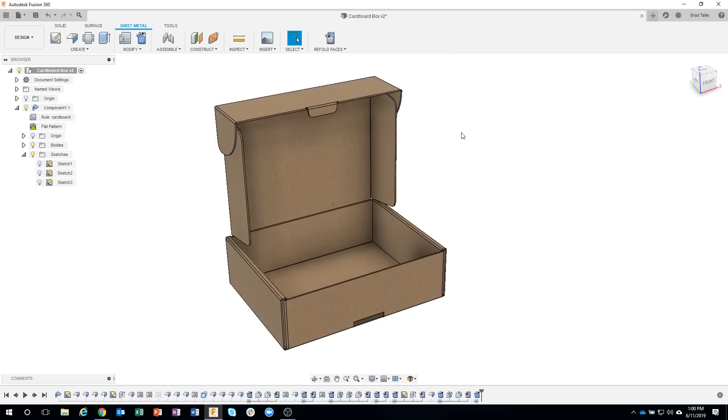I have an example cardboard box here, and I'm going to show how to create this. This actually came about because I have a cardboard box that a product I ordered came in, so I thought, hey, I wonder if we could make something like this. Here's the actual design, and you'll notice it looks pretty much exactly the same as what I just showed. There are little tabs, holes, and we're going to go through and learn how to make this box inside of Fusion 360.

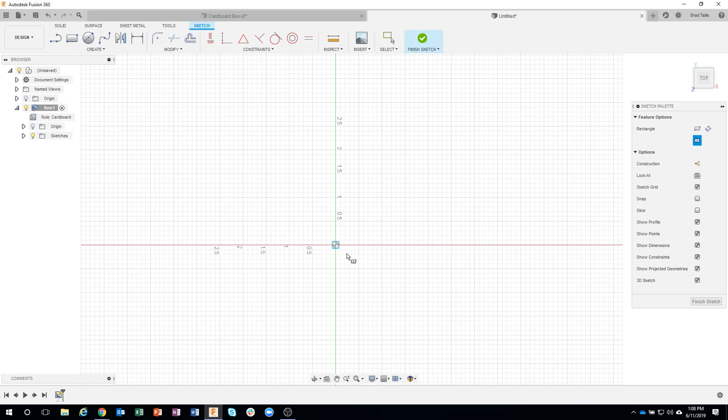Underneath this box component, I created a sketch. Let's go ahead and do a centered rectangle. This is important - I'm going to try and keep things as symmetric as possible because this box is pretty symmetric; what's on the right side is kind of on the left side, etc. So I'm going to create a symmetric rectangle. According to my measurements of the existing cardboard box, it's about 10 3/4 inches in length by about 8 inches in height. So I'm just going to type in those dimensions and hit enter - 10 3/4 by 8.

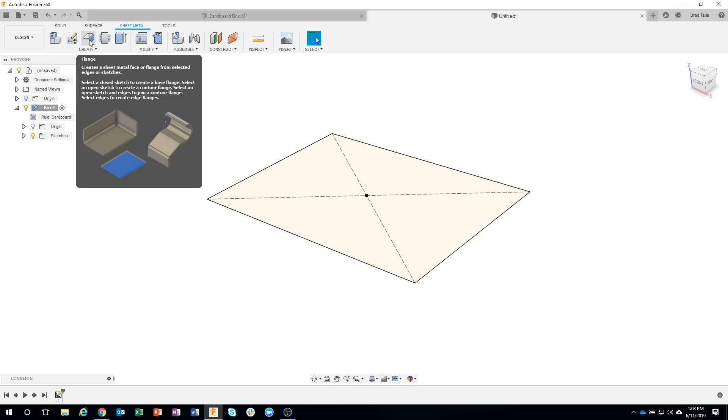I'll finish my sketch, and now I'm ready to start creating my sheet metal part. The cool command here is this flange command - it's actually multiple commands in one. Here's a cool tip: if I just click on my profile and right mouse click, that flange command is at about 4 o'clock in my marking menu, so I don't have to keep coming up to the menu to do that. So I'm just going to come over here and say flange, and you'll see it gives me a preview of what that looks like. I'll say OK, and I now have a bodies folder underneath my box component.

Okay, so let me go ahead and close that up. So now I have this rectangle, 10 3/4 by 8, and I want to start folding the box. I typically do the easy stuff first and then work my way toward complicated. Now, these first two flanges are going to be pretty simple, but the next ones after that is where it gets a little bit more complicated.

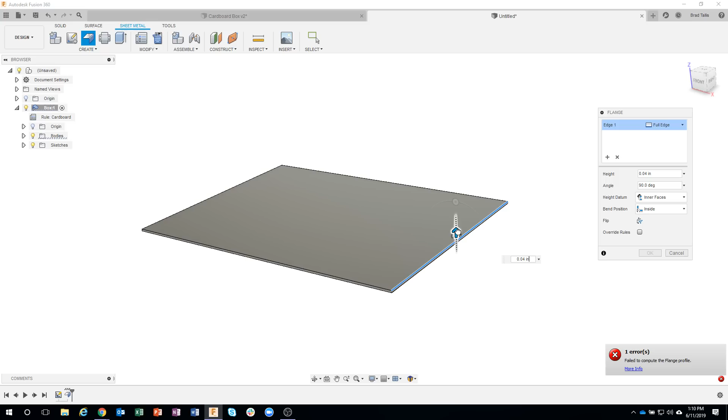So I'm going to click on this top edge, right mouse click, and say flange, and you'll see it brings up this flange menu. Now I like to start to drag, and you'll notice we get an error - every time you drag, you'll get an error. The reason for that is because when it's too small, it physically can't create the preview, so it just says it failed to create that profile. But as soon as you get far enough, that goes away. So don't freak out when you see that error, especially when you're doing a preview like this.

Now it's asking for the overall height, and again, according to the measurements, it's 3 1/4. So I'm going to type in 3.25.

It gives me a nice preview, and I'm going to zoom up here and notice how small this little tiny radius is right here. Again, that was because when we created that cardboard material, we set the bend radius to be 0.01. So it's almost like we're kind of crushing the cardboard right there.

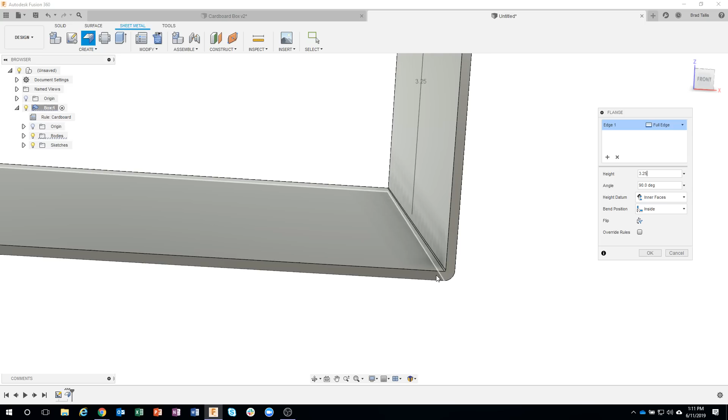Where if this was regular sheet metal, you'd probably have a larger bend radius there. So you could use sheet metal for creating sheet metal parts, cardboard, plastic parts. You could actually heat plastic and bend it. If you know what the minimum bend radius needs to be for those kinds of materials, you can use sheet metal for any of those designs.

Now I'm going to do the other edge at the same time. So I'm going to go ahead and Control select both of those edges. We can see how it's creating a bend for us automatically at 90 degrees at a height of 3 1/4.

Now we're going to learn about these bend positions and stuff like that a little bit later. But I'm going to go ahead and change the height datum to be outer faces. Now, again, I'm doing some things here where you might be like, well, why did he do that? Definitely recommend watching that other live stream where I talk about each of these options here, like the height datum, the bend position, etc. But I'm going to set this to be outer faces.

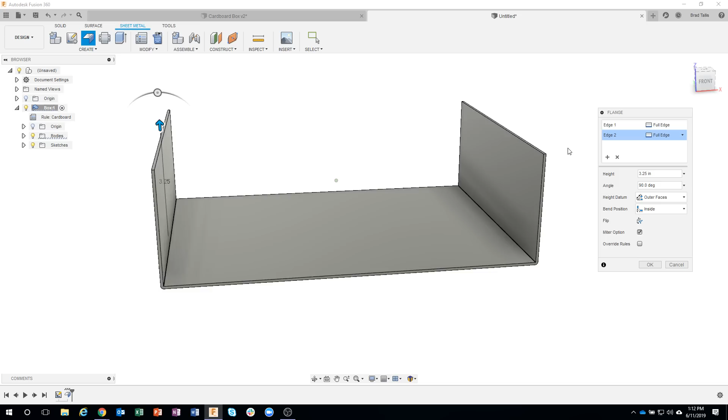What that's basically doing is it's saying it's going to be 3 1/4 from this bottom face to this top face here. If I had it set to inner faces, it's actually going to be 3 1/4 from this inside face to the top face. And just to be exact, the overall height of the box was 3 1/4 from top to bottom, so that's why I changed that.

We'll talk about this bend position a little bit later. I'll go ahead and say okay. And that's basically, we're just starting the cardboard box.

Now I could flip back and forth between the video and the screen or whatever, but I'm just going to kind of simplify things here. But we're starting with the design of the box. Let me jump over here. Actually, this might make more sense. What we just did is we just created this wall here, and we've created the bottom here. So we just created this wall.

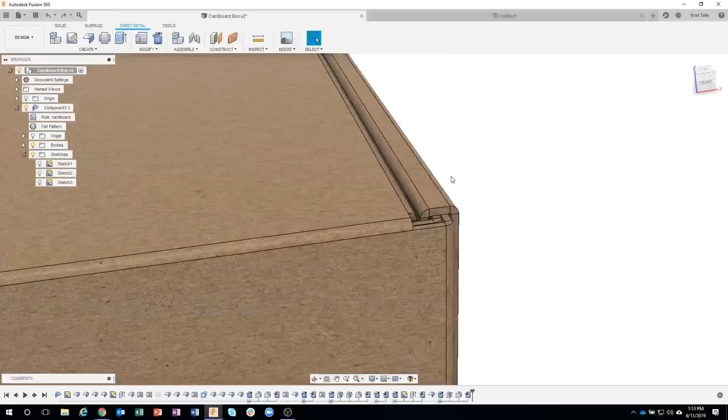Now I want to create this folded over section right here. And you can actually see it's getting kind of complicated in here, but we've got multiple flaps that kind of fold into this area here. And that's how this box stays together. Okay, so that's what we're going to do next.

So I'm going to click on this edge over here, right mouse click and say flange. Again, I like to start to drag just to get kind of a preview of what that's going to look like. And using the measurements from the cardboard box, this was 0.375. And so you can kind of see when I typed that in, it kind of jumped back a little bit.

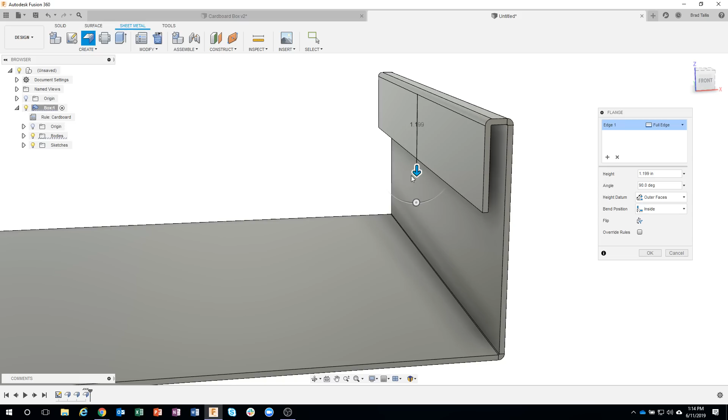We're going to go ahead and leave everything alone. I'll say okay. And then the next part I want to do is to basically create the part that folds down. So I'm going to click this edge and say flange and start to drag. And we can now see how we're basically kind of folding this cardboard over. Now I want this height here to go all the way down to here.

So I'm going to go ahead and click on that face. And again, you'll notice, even though I clicked on the face, it didn't go all the way down. And that has to do with this height datum. Okay, so I'm going to change that to be inner faces, but notice what happens now. It's actually intersecting with the model, and this is bad.

Okay, we'd never want our sheet metal stuff to physically intersect with each other. And so I can see right here it's 3.098. Let's go ahead and just take the 8 off of there, and now we can see that that lifted up just a hair off of that floor.

Okay, and this is fine because it's not intersecting. And later on, I'll show you what happens if you accidentally intersect. We're going to create a mistake here in a little bit, and you'll see how we're going to fix that. So I just removed just a little tiny bit off of that. And again, I'm just going to leave everything the same and say, okay.

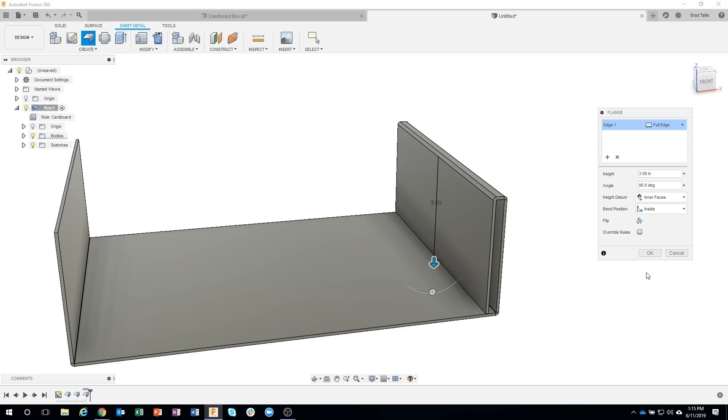So we just started creating this side. Now here's one of the tips that I highly, highly recommend you do when you're working in sheet metal, and that is to unfold it as you go through your design. So I'm going to say unfold, and it's asking for a stationary entity. What's kind of staying flat?

So I'm going to say this guy, and then you can see it says bends, and it's highlighted a couple of our bends in green. Now I could do one at a time, so I could click on any of these, or I could say unfold all bends. And this is what I typically have set, okay? And you'll notice that it laid out flat. So this is good. If it unfolds and lays out flat, we know that everything is good, okay? So I check my work as we go through by unfolding to make sure this thing can physically unfold.

Okay, so the next thing I want to do is, it's kind of hard to see on the box, but there's some holes right here, so some slots that these little tabs fold down into and are held in place like so. And so we're going to simulate that. So what we basically just did is we just created this area right here, where we came across and then we folded it down again.

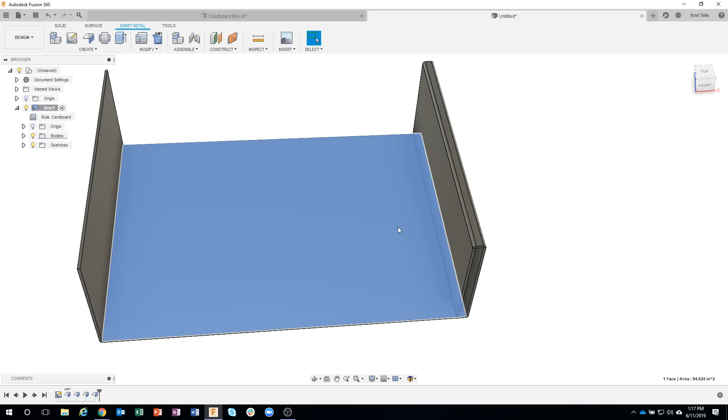Okay, hopefully I don't have to jump around too much there, but what I want to do now is create those holes. And this is what I think is so cool about our sheet metal, is we can use regular modeling commands, like for example creating a sketch, and I'm just going to mock up my design. I want to put a rectangle right in here somewhere, and maybe one up here. I'll just line that up, do something like that.

Now I want to be more precise, so I'm going to hit D for dimension, and let's just make that 1 inch tall, and let's make it 1 inch from the edge of the box, because that's how it is on the actual cardboard box. So you can see how it's 1 inch tall, it's 1 inch from the edge. And I want it to be a specific width. I want it to be a little bit wider than the cardboard itself, because we want to be able to push that tab into this.

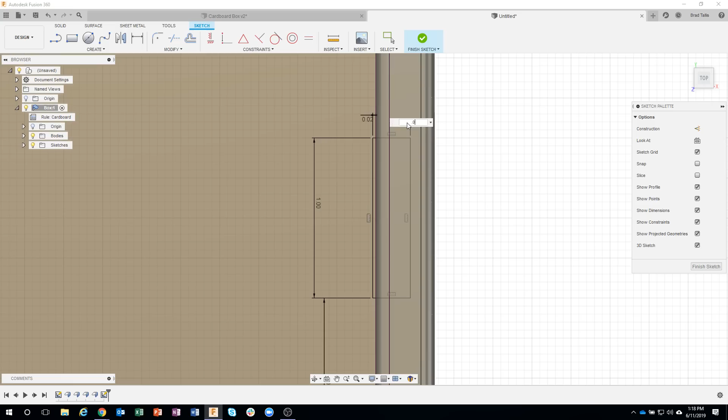So I'm going to say, let's just do maybe 0.02. You can see how that moved over, and I'll do the same thing right there, 0.02. And now you can see this rectangle right here, and you can see inside of that the piece of cardboard. So we have a little bit of extra room there for it to slide down into. So I'm going to do the exact same thing up here. I'll just throw a couple dimensions on here. Make that 1 inch also. 0.02. And same thing over here.

Now here's another neat little trick. If I place my dimension, I can just click on an existing dimension, and it's going to reference that dimension. So instead of having to type in 0.02 again, I could just click on this guy, and that one's going to equal it. Okay, so I'm going to go ahead and say Finish Sketch. And now I've got some rectangles here, but they're hard to see. And I've shown a cool trick where you can probe through just by clicking and holding your mouse, and I can grab that profile. But unfortunately, I actually need to grab about 3 profiles. It's really hard to see there.

So another tip that I sometimes do is actually turn off the body. And now you can see just the sketch, and the body is out of the way. And now you can see, sure enough, there's this little rectangle here, a larger rectangle, and a little rectangle there. Well, why is it split into 3? Well, it has to do with that piece of cardboard that got automatically projected.

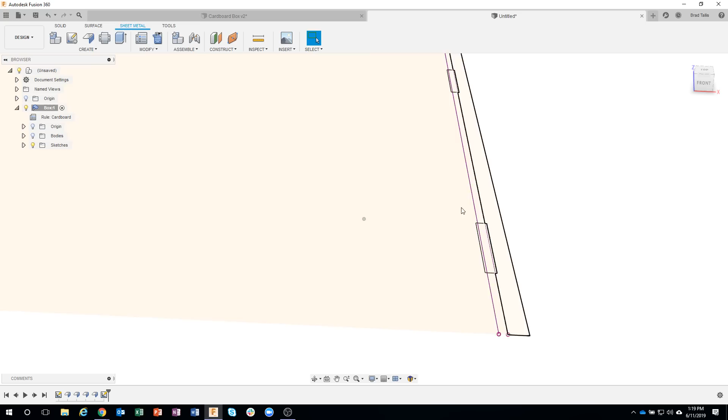So here's another neat little trick. I can go back to my sketch, and let's just click on those 2 lines and turn them to construction geometry. And so now they're construction lines, and this is all one profile now. It's not being split by those other object lines. So I can much quicker and easier click these profiles.

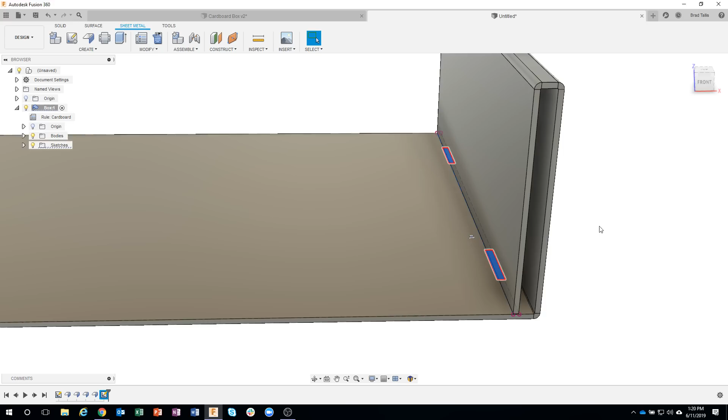Hopefully that makes sense. I'll go ahead and turn the body back on here. Right mouse click and say either extrude or press pull. It doesn't matter. I'm going to just start to drag down, and you can see it's taking those rectangles and machining it or cutting it through the material.

Now how far? Well, just click on the bottom face. And it snaps to that bottom face and it sets that distance for you automatically. I'll go ahead and say OK. And I've now created those holes for where we want these tabs to be. So the next step is to create the tabs. And you're going to learn a couple cool little tricks here.

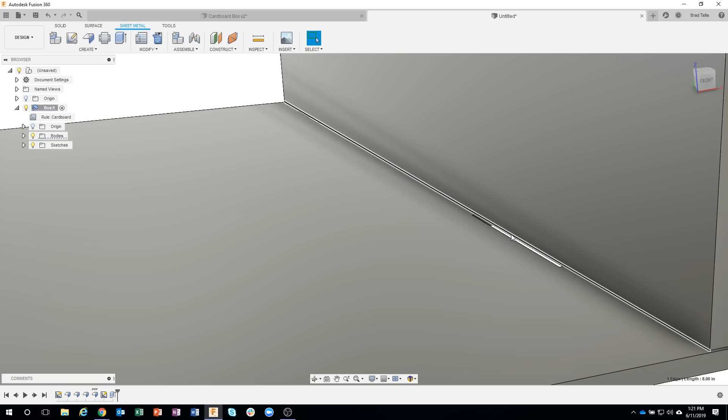So the first thing I'm going to do is kind of zoom up on this. Let's work on this front tab right here. I'm going to click on that edge, right mouse click, and say flange. Now by default, it's wanting to put a flange along that full edge. So if I were to start to drag, you're going to see it's going to try and put a flange along that full edge. Okay, well, we want to just do a little section.

So I'm going to click on there. Actually, let me cancel out so it doesn't remember things. I'm going to say flange. I'm going to change this and do a 2 offset. Now what this allows you to do is to actually create the tab wherever you want. And what I typically do is I get it kind of close. So you can kind of see I drag the arrow there. I'll drag the arrow kind of over here.

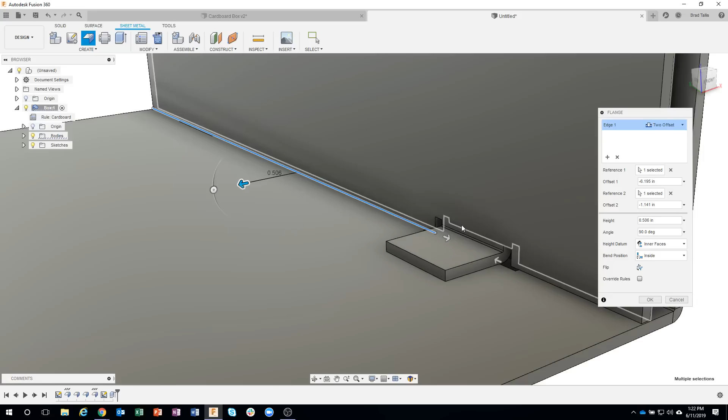Okay. And now when I start to drag my height, you'll see that it's only putting that tab where these 2 offsets are. Now the other issue you see is it's going at a 90-degree angle, and we want it to go straight down. So I'm going to change angle to be 0. And now it's actually basically adding some extra material to that edge.

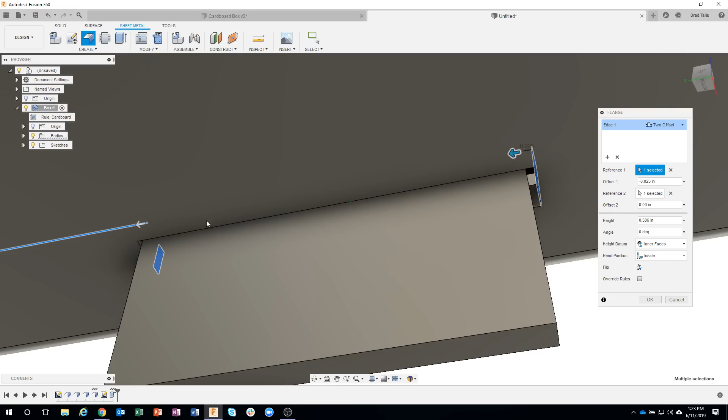Now we want to be more precise. So I'm going to go ahead and clear this reference and maybe click on this face here for one reference and this face here for the other reference. Now that is exact. So it's not giving us any slop or anything like that. So I want to basically drag this back a little bit to give us a little bit of extra room. Same thing over on this side. I'm going to drag that back a little bit to give us some extra room.

And in this case, let's just do maybe 0.02. Let's see what that looks like. That gives us a pretty good gap there. So I'll say 0.02. And then the last thing is the overall height. Okay. So we can kind of see that with this arrow here.

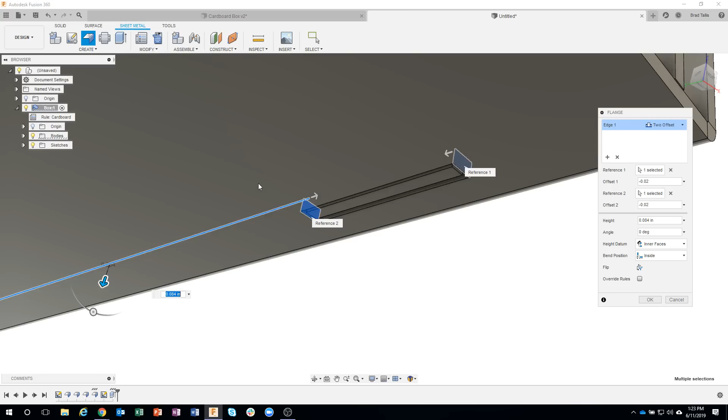So another neat little trick is I can click on an existing face and it's going to snap the height to that face. So instead of having to do a lot of measuring or guessing, where I'm like, okay, that looks close, but it's not quite, all I have to do is get near a face and click, or an edge or a point, and it's going to snap to that face. And you can see we have pretty good clearance all the way around for this tab. Okay, so I'll say okay.

Let's go ahead and unfold this really quick just to see what that looks like. I'll say unfold all the bends, and let's just click on that, and we can see we've got a little rectangle and we've got this nice little tab that's going to tuck down into that rectangle to kind of hold it together. So I'm going to do the exact same thing on this other tab. So I'll come in here and say flange, and I'll do the 2 offset. Again, I just kind of get close just to give me a visual of what that's going to look like. I'll start to drag a little bit.

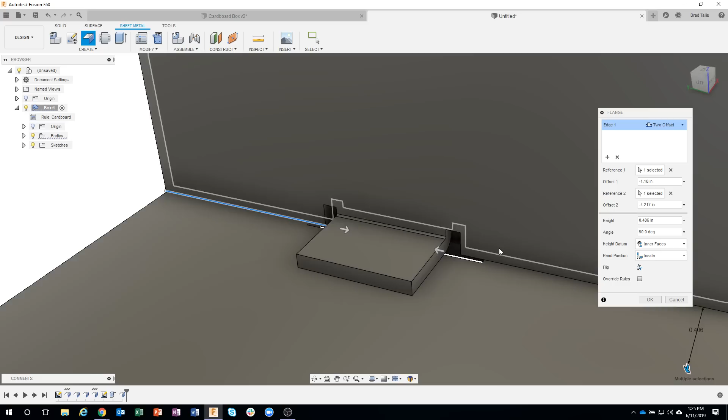And actually, while we're sitting here, you can see the square reliefs. It's kind of hard to move my mouse here, but you can notice how they're square. This was one of the settings we set when we created our cardboard material. Instead of them being round, I told them to be square. That's the result of that. So we'll set this to be 0.

I'll go ahead and clear our references and just click one reference there, click another reference here, and kind of see what that looks like. Then I kind of drag just to make sure I'm going in the right direction. I can see both of those are in the negative direction, so I'm going to say minus 0.02 and minus 0.02, like that. And then finally the height, I'll click on that bottom face, and boom, we're done.

Okay, we've just created this area that's folded over that has the two tabs. I'll unfold again just to confirm. Yep, that means it's valid. And then I just cancel out of my unfold. I don't have to undo or anything like that. I just hit cancel.

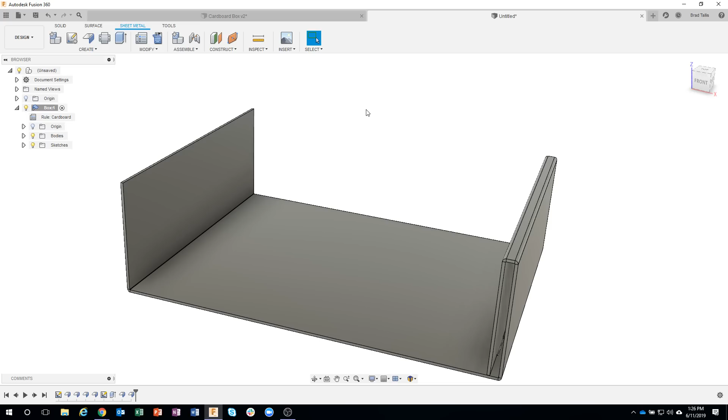Okay, so we've spent quite a bit of time working on this one side. We've created some rectangular holes, we've created a couple tabs, etc. And I want to do the same thing over here. And you're probably going, wow, this is going to be like a 2 or 3 hour live stream if he's going to have to model all this stuff. Well, here's where it gets cool. You can actually use regular modeling commands such as the mirror command. And this blows me away. I'll be honest. I haven't seen other software that can do this as powerful as Fusion.

So I want to mirror what we've done over here to go over here. Now in the mirror command, by default, I think it's usually set to faces, but let's go ahead and change it to features. And I want to mirror a couple of these features. So I want to mirror that slot, and I'm basically working my way backwards. I'm going to mirror that. I'm going to mirror the extrude. Now you can't mirror the sketch, so I'm going to leave that alone.

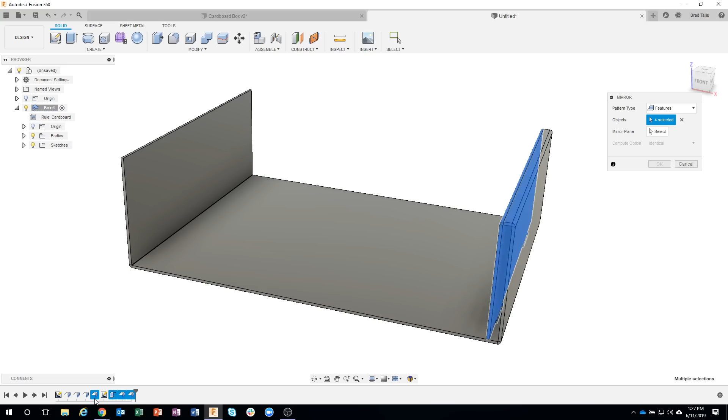And then I'm going to mirror that flange, which is kind of hard to show, but it's this vertical one right here. You can kind of see how it's highlighted in blue. And then I also want to mirror this little flange right here. So we're actually grabbing more than half of our timeline, and we're saying, let's mirror that. What's the mirror plane? Well, remember when we first started, we drew a centered rectangle? This is the exact reason why. I can now just select this center plane like so and say OK, and boom. Check that out.

I hope you guys think that's as cool as I do. I mean, think about how much time it would take to draw another sketch, draw those rectangles, dimension the rectangles, blah, blah, blah. We were able to just mirror existing geometry, and we're actually going to do that quite often in this design. So what should we do? Let's go back to sheet metal and unfold. So I'm going to click on unfold all bends. It lays out flat. So believe it or not, even though we mirrored this geometry over here, it still recognizes that as sheet metal geometry and unfolds it.

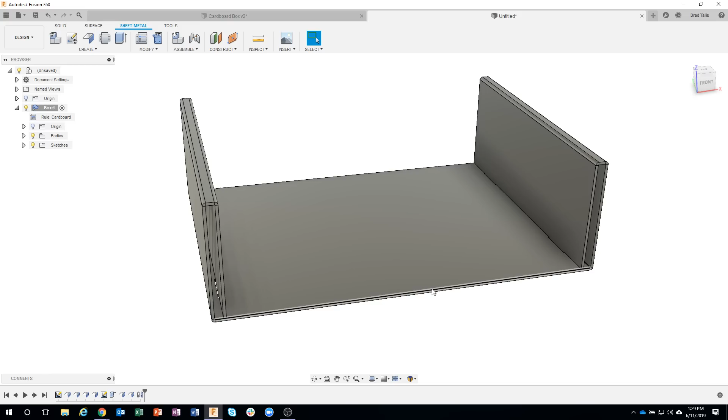Okay, so what we're gonna do now is click on this front edge, right mouse click, and say flange. Now, I'm gonna go ahead and start to drag, so you're gonna see an issue. Okay, notice what's happening here. We can kind of see how it's interfering with these bends that we just did, and that's no good, okay? The reason for that is notice the bend position is set to inside. So it's, oops, too far. It's trying to bend and make this flange be on the inside, okay? Well, because it's doing that, it's interfering with that other geometry.

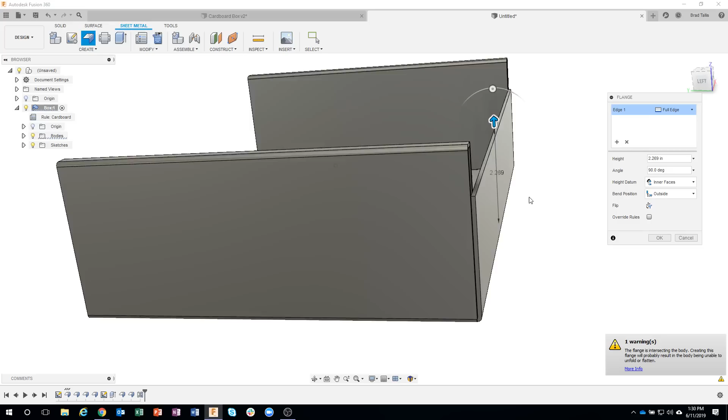If I set this to outside, we can kind of see that that looks a little bit better, but let's zoom up on here. It's going to be kind of hard to see, but this face is still touching this face right here. And that is no good. We cannot have those touching. So I'm going to say adjacent, and you see it kind of, let me zoom up there so you can kind of see what's going on here. I'm going to say outside. You can see where it's at, and notice it actually says the flange is intersecting the body. It'll probably result in being unable to unfold or flatten. So that's outside.

Then I'm going to say adjacent, and you'll see that it offsets just a little bit. Well, what does that mean? Well, let's take a look at the side here, and I'm going to zoom up. So it's basically, instead of having this face be touching this face, it's doing the bend and then creating that face. So let's go ahead and change this to outside.

You can see how that's touching and the bend is right there. And we say adjacent. It basically comes to here and then does the bend and then folds up. And this is exactly what we want. We want a little bit of slop in our design. Okay.

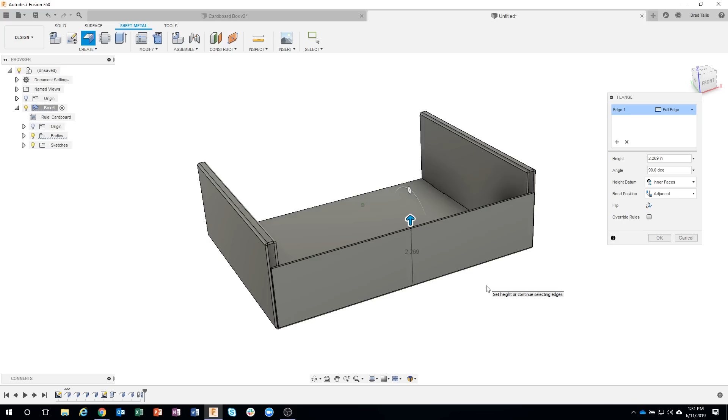So I also want to control where the ends of this flange are. So I'm going to change this to be symmetric. And I'm going to start to drag. And we can kind of see what that looks like. And again, if I zoom up here, we can see the square corner reliefs. Well, I want this cardboard basically to end at this edge. So I'm going to go ahead and click on that edge and notice what it did. It actually changed the distance, and so it snapped to that edge.

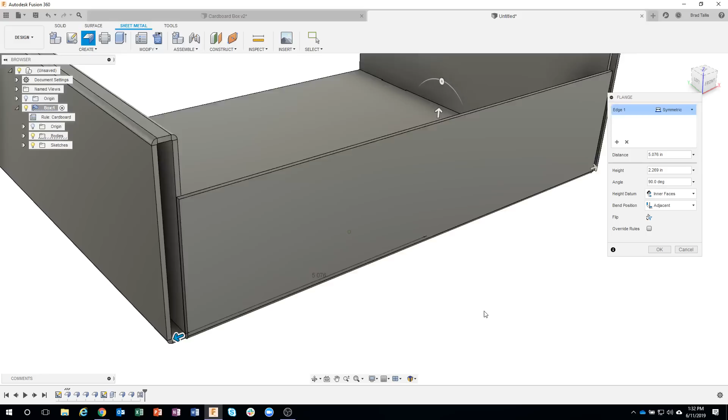Let me do that again. I was out here, notice we're at like 4.3. All I have to do is hover over an edge or a point. It really doesn't matter. I'm going to click on that face, and it snaps to that face. And because it's symmetric, it's the same on both sides.

And then finally, I'll do the height. And again, I'm just going to kind of drag up. How far do I want to go? I want to go basically up to this edge right here. So I'm going to go ahead and click right there. And that gives me a height of 3.098. Okay. Now, I want this to be just a little bit below this edge, because we're going to basically fold this edge in, and I don't want it to interfere.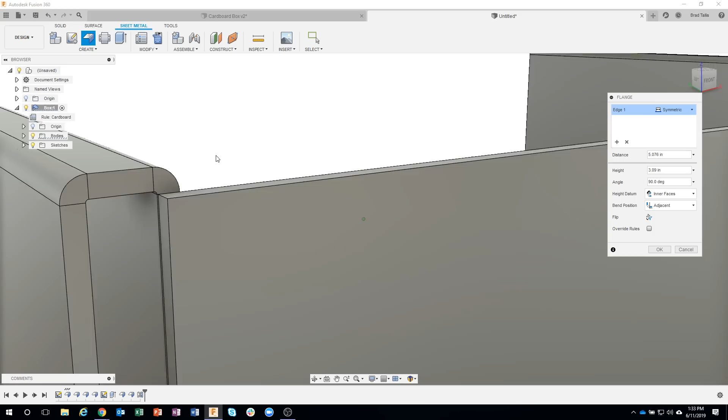So instead of 3.098, let's just knock that 0.8 off, and you'll see that that drops down just ever so slightly. Okay. I'll go ahead and say OK, and we now have that front edge.

Now what we're going to do is create those side panels that kind of fold into these rectangular regions right here. So let's just zoom up a little bit. I'll grab that edge, right mouse click, say flange. And again, I like to personally drag just to kind of visually see what that's going to look like. And we can kind of see how that's folding in. And we have a little bit of clearance here, and we've got a little bit of clearance there.

And the reason we have that clearance is because of this adjacent bend position. If I were to say inside, obviously that would not work. If I were to say outside, it looks like that would work, but it's touching right there, which is still no good. So I'm going to say adjacent.

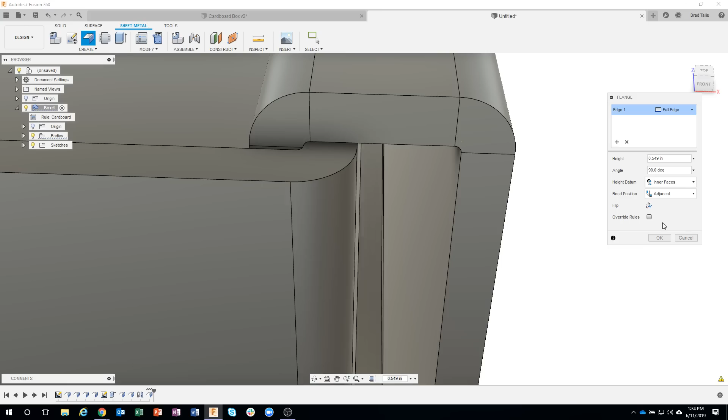According to my measurements, this flap, which you really can't see right now, goes back pretty far, about 3.5 inches. So I'm going to type in 3.5. We can see a nice preview of what that's going to look like. So you can kind of see how far back that goes. And we'll say OK.

Now, here's a neat trick. I just did this one edge, and I typed in some distances and all that kind of stuff. I could say OK and do another flange, or I could come over here and control select that other edge and do both at the same time, which is what I personally recommend. We're kind of doing these two pieces that are the same. So I'll say OK.

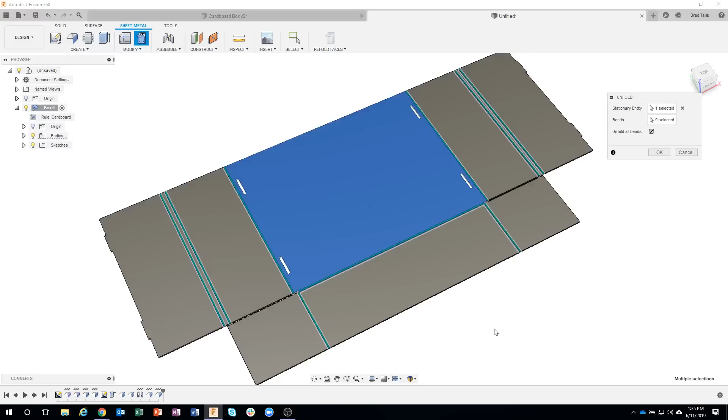What should we do? Well, let's unfold. Let's confirm that this is still okay. So I'm going to say unfold all bends, and there you can see what we just did. We just made these two panels that you see right here and here. I'll go ahead and cancel out. There we go. We're back to where we were. Pretty cool, I think.

Okay. Now, we've spent some time making the front with some flanges or whatever you want to call them, and I want to put those on the back. So let's jump back to our solid tab, create a mirror. Again, making sure we're set to features, and I usually work backwards. So I know I want that flange there, and I want that flange there, and that's about as far back as I need to go. I don't need to do this mirror or anything like that.

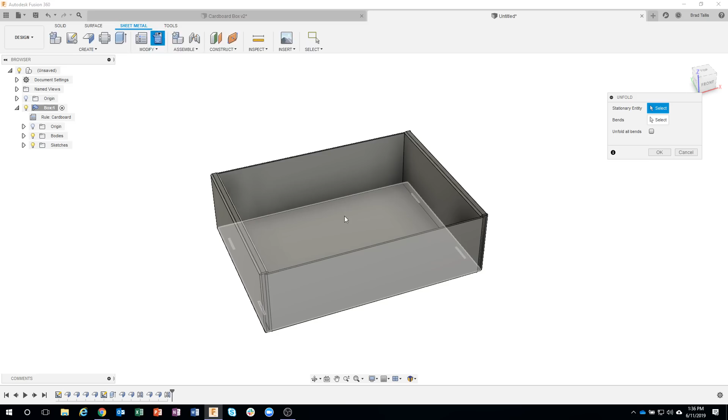So I'm going to select those two features. What's our mirror plane? That guy. And boom, we just created the back of our part. Go back to sheet metal, unfold, and it unfolds. Okay? So we know that everything is good so far.

Okay, so the next thing is to start working on, so we've finished the back here, let's start working on this top. And again, it comes across and it folds down and it's got some flaps that fold in around and all kind of stuff. So that's what we're going to do next. So I'll click on this top edge, right mouse click, say flange.

And again, we're using basically the same command over and over again, the flange command, to build this box. I'm going to start to drag and I instantly see a warning, which kind of makes sense. It's interfering with this existing geometry. So we're going to have to figure that out. So I probably need to offset that a little bit. So let's do a symmetric edge.

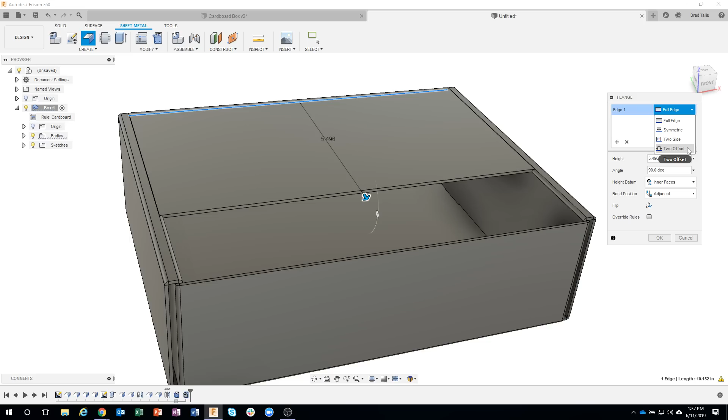Now you'll notice there's 4 different kinds. And again, I cover these in that Unfolding the Mysteries live stream. But basically symmetric allows it to move in symmetrically on both sides. So I'll do that real quick. And then I'm going to click on that face to snap to that face. Now, I've mentioned before, we don't want it touching, but I was able to reference that face. And you can see it's a distance of 5.

So let's make that a little bit smaller. Let's go like 4.97, and you'll see how that kind of hopped in just a little bit. Let's go back to 5. We can see that it's touching. And so I'm just going to kind of knock a little bit off. Let's just say 4.97, or I could do even 4.98. It really doesn't matter in this case.

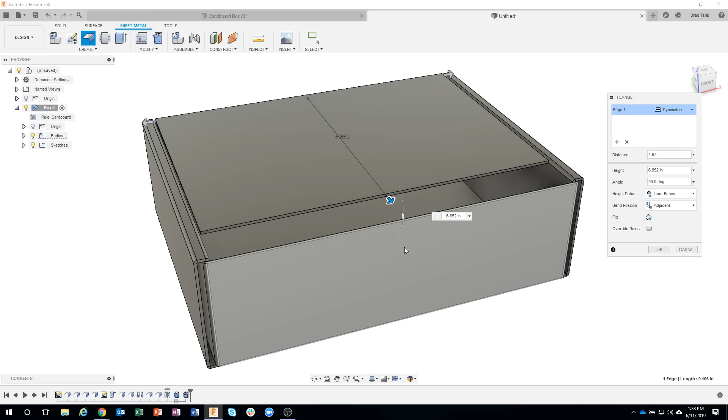Okay. And then let's set the overall height here. Oh, I love referencing existing geometry. So I'm going to click on that face, and we get that result. You can see that it jumped to the correct height. Now you'll notice it says bend position adjacent. Now I'm going to purposely make a mistake here. I'm going to change this to be outside, and notice what happened.

It's hard to highlight, but watch right here. Adjacent looks good. We can see both of those edges. There's a little bit of a gap there. But let's go ahead and set this to outside. And when I do outside, again, I'm zooming in here so you can see what's going on. Let's do adjacent. You'll see that that's sitting up a little bit higher, right? It's kind of hard to see, but that's sitting up higher than that edge there. I want it to be flush, so I'm going to change this to outside.

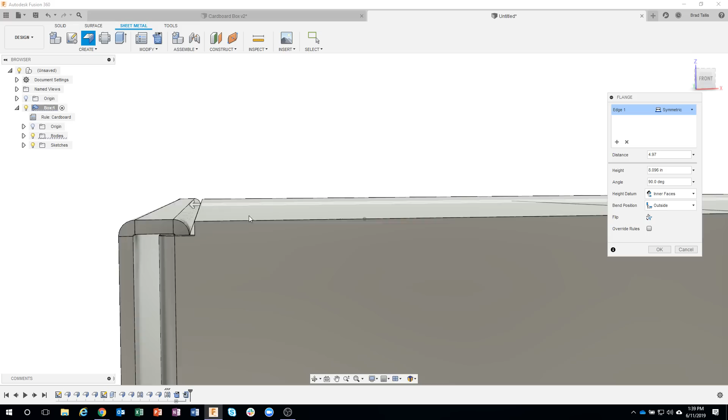But now it's intersecting with this other geometry. And let's pretend I didn't realize that. I'm going to go ahead and say OK. And it'll actually accept that. Now I'm going to test my work. I'll come in here and say unfold. I'll do my stationary entity and say unfold all bends. But notice the result that I got.

And this is the exact reason I typically unfold after I do a step or two to confirm, did this thing that I just did cause problems? And in this case, obviously it did. Okay? So how do we fix this? Well, the cool thing is I don't have to undo. I can just go back to my flange right here, and I could change it to be adjacent, but I want to keep it the way it is. So let's do some timeline magic.

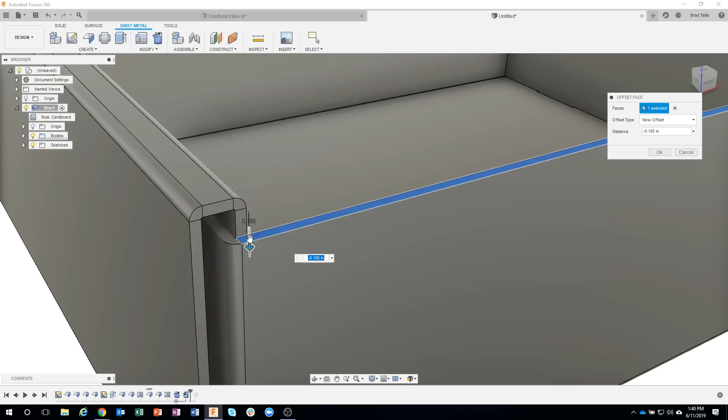I'm going to drag my marker before that flange, and you'll notice it goes away because it hasn't happened in time yet. Then I'm going to zoom up here, click on this face, right mouse click, and I want to press this face down a little bit. Now I'm going to over exaggerate, but notice even though I only selected one face, it's actually grabbing all of the faces that it needs to move that flange down. Now I don't need to move it that far, but I do need to move it in the negative direction, which we can see right there.

So let's just go maybe 0.01 should probably be far enough. I want to confirm my notes. Yep, 0.01. And so that basically just moved it down ever so slightly. I'll say OK. So we've moved that face down. Now I'm going to go forward in time, and there's my flange that was recreated.

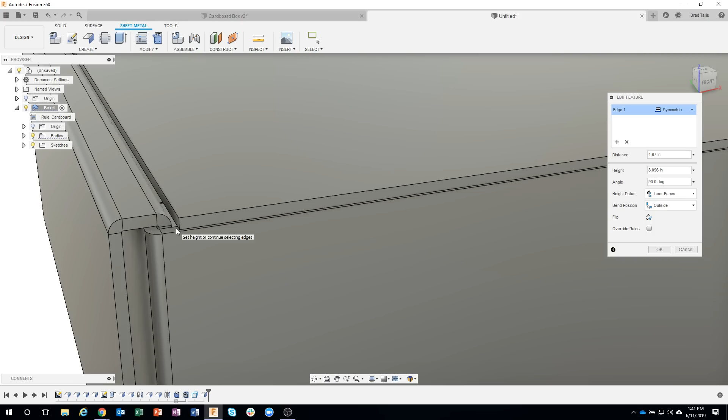And it's still set to outside instead of adjacent. So we were able to go back in time and just move this face down ever so slightly to make this work. So hopefully you think that's cool. I love the fact that I can do that to go back and make changes.

Now I want to, let me see. We want to start creating this side, we want to create something that comes down over this front piece of cardboard, and that will allow us to create the side.

So I'm going to go ahead and zoom up here, click on this edge and say flange. I'll start to drag, and we can see what that looks like. Now I know from experience that outside makes it touch that other face, which we don't want. So let's set that to adjacent.

And the reason it was set to outside is because it remembered the last bend position type that we did. So this time I'm going to say adjacent, and you'll notice how it added that little bit of extra area there. And I want to go ahead and tell it how far I want it to go.

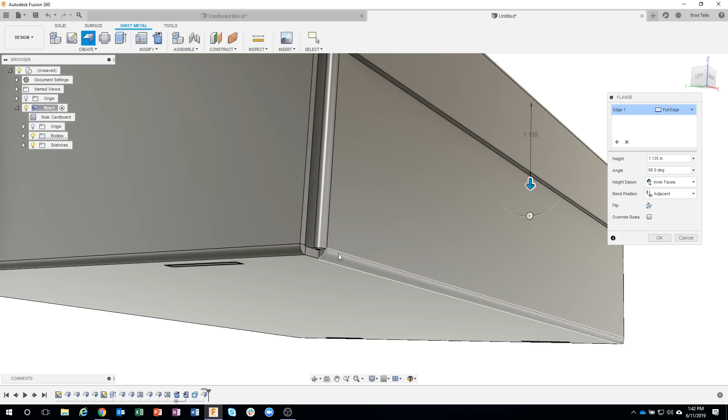Now, I've been clicking on faces, but you can also click on points or edges and stuff like that. So I'm going to click this point, and you'll see that it set the height to that point right there, instead of all the way down to the bottom.

Now, why right there? Well, we're going to fold some cardboard into this extra little opening here, and if I had gone too far down, it would clash with this other geometry. So that's why I said I want to go to right there, and that is perfect. I'll say OK.

So what we're about to do now, I'm not going to show the actual cardboard box. I'll come over here. What we're about to do now is create this flange here. So we just created this folding down part, but you'll notice that we actually need to come to the left a little bit before we do our fold.

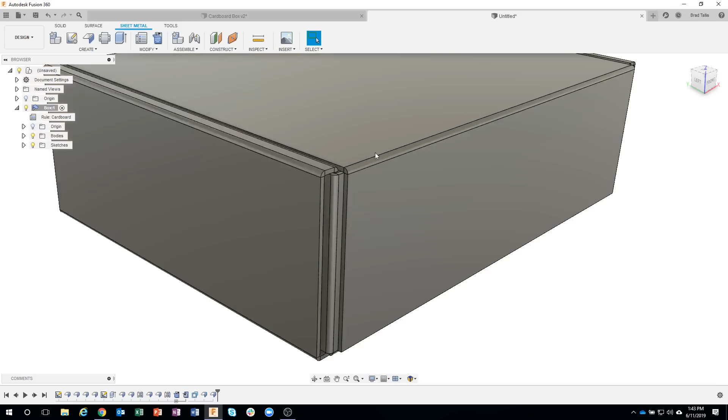So another neat little trick. I'm going to click on this edge right here and create a flange.

Now, if I start to drag, we're going to get some major issues, right? It's going to try and fold in. Well, I want to add the material to the left. So instead of an angle of 90, let's set it to 0. And you can see that it's actually adding material to this face.

So instead of doing press pull or anything like that, I can just add some extra geometry using the flange command.

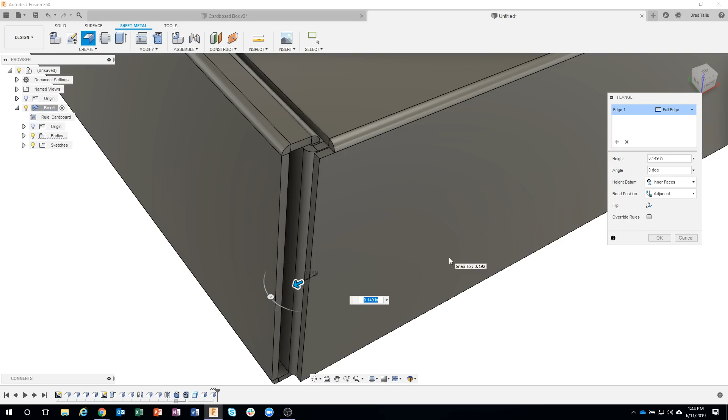Now, how far do I want it to go? Well, I want to basically line up with this existing face. So let me drag back a little bit. I'll click on that face, and you can see how it snaps forward and lines up with that face. I really love the snap capabilities where we just click on points, click on faces, etc.

Okay, angle is 0. I'll just leave everything else alone. I'll say OK.

Then we'll go ahead and click on that edge, flange. I like to preview, so I'm going to start to drag, and we can actually see what that's going to look like. And sure enough, there's a little bit of space between there, so we know that that's going to look okay.

It looks, oops, way too far. Looks like there's some space between there and there, so that looks good. And we have a little bit of space right here. Again, I apologize for the flashing when I hover over faces or whatever.

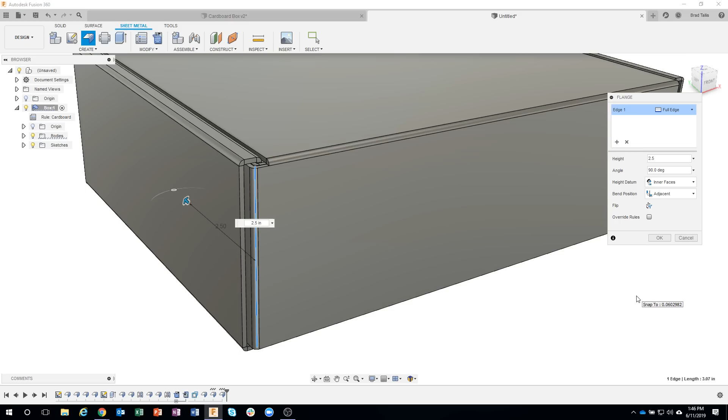Okay, so this tab that we're creating, I need to now specify the height of that. And it's actually fairly large, 2.5. And I'll say OK. So what should I do?

Let's unfold. Now I've been clicking on the bottom face as the stationary entity. I could click on any face, it really doesn't matter. Let's just click on this top face. But the key thing is to make sure it unfolds, which it does. And here is that tab that we just created.

Now what's neat about this, and the actual cardboard design, it's rounded over because this is basically what gets folded in to close the box. And you don't want any sharp edges, but I can't really see that new flange that I just created.

So let's go to unfold, but this time I'm going to uncheck all bends. And my stationary entity, let's do this front face. You can see it highlights all of my bends in green. So I'm going to go ahead and just click that one bend, and you can see that it unfolds just that one, and I'll say OK.

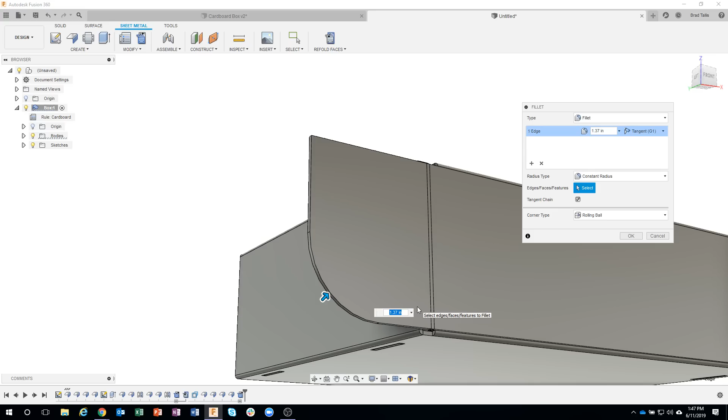Now I can work on this just like it was regular modeling. So for example, I'm going to click on this edge right here and say fillet. I'll start to drag so we can get a visual preview of what that looks like. According to my measurements, it's 2.5, my bad.

This next one, I'll zoom up here, and I'll say add a new selection. I'll click on that edge. And what this is allowing me to do, this is a neat trick. I don't know if you know this, but you can actually have multiple different size fillets in one fillet feature in your timeline. So this is actually 0.5 for the size. So you can see we have 2.5 and 0.5, and I'll say OK.

And there's only one fillet feature in my timeline, but if I were to edit that, I could come back and change either of these. I like it, it's almost like grouping them together. Because these are both on the same tab, that's why I did them both at the same time. So I was able to unfold this tab, add my fillets to it, and now I'm going to say refold faces, and it folds it back in there. I think that's pretty cool.

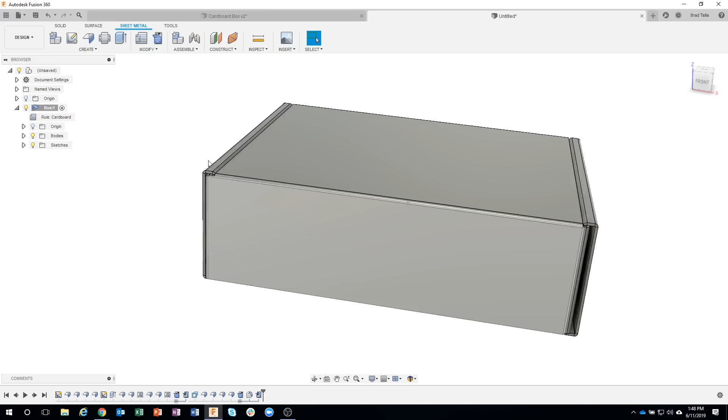Guess what we're going to do? Because we spent the time doing that, let's jump back to solid, say mirror. What are the features? Well, I'm not going to mirror the folds or the unfold, so I'm going to do the fillets and that flange. And I need to make sure I grab that little flange where I added some extra material, which was that guy there, not that one there. So I'm going to grab those three, select my mirror plane.

Now, I've shown this multiple times, but I can't click on my mirror plane. Well, I just click and hold for about a second, and now I can probe through. You can see the top face, the inside face, there's my origin, the inside bottom, and the outside bottom. It's like a laser. So I'm going to pick on that guy there. It gives me a nice preview. I'll say OK. And let's just zoom up on here, take a look.

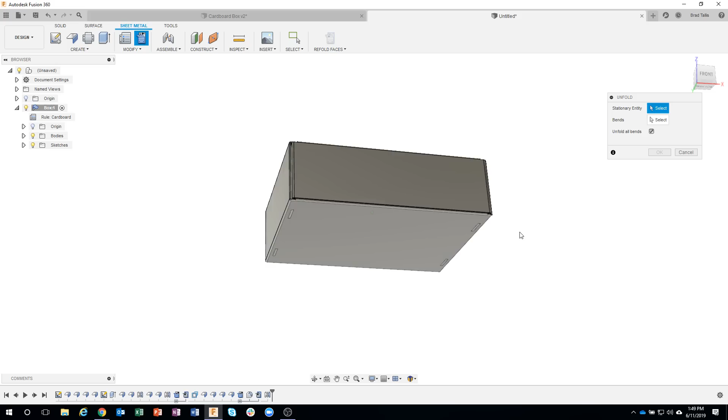Let's unfold, let's do all the bends. And it unfolds. So far so good. We are doing very well here. Okay, we're kind of on the last legs here.

It's kind of hard to see, but let me jump in here. Let me unfold a couple of these guys real quick. So I'll make this stationary. And I'm just going to unfold this bend here. Notice it gave me an error there. So I had to unfold both of those. But now we can see how these tuck in where these other flanges are.

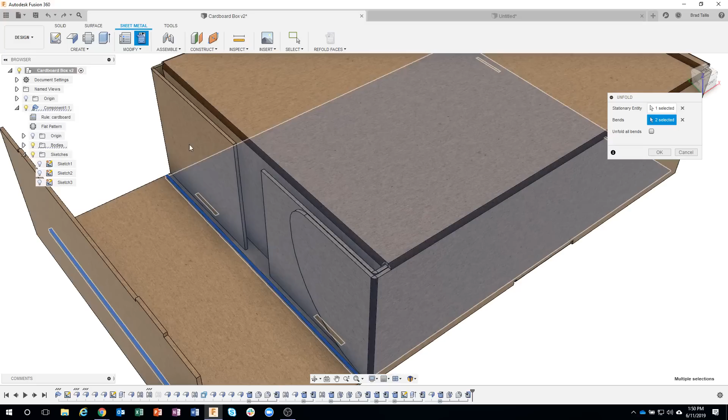And then there's this guy, which is actually tapered, which tucks down and kind of holds the box together also. So that's what we're going to be creating next, this tapered section. So I'm going to zoom up here and click this bottom edge.

Now I'm going to show you a neat little trick. Let's say I accidentally click this top edge and say flange. When I start to drag, it's obviously going in the wrong direction. Well, you can hit flip right here, and you'll see that it actually flips it in the opposite direction. So if you can't select the edge or whatever, you can use the flip. Now, I personally like to try and click on the actual edge, that way I know my measurements are correct and everything like that. So I'm going to grab that edge and say flange.

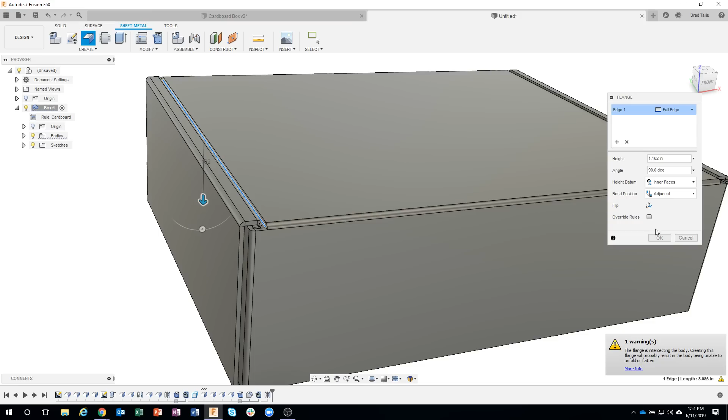Okay, and start to drag. Now it's really hard to see what's going on right now. Everything's kind of hidden and folded in, and of course I get a phone call, sorry about that. So I'm going to cancel out of this, and we're going to use a neat little trick. I'm going to go under the Inspect menu and say Section Analysis.

I'll click this front face, and this is going to allow me to slice through my design, and I can actually slice back and see inside the box. I'll go ahead and say OK, and now we can see everything inside the box.

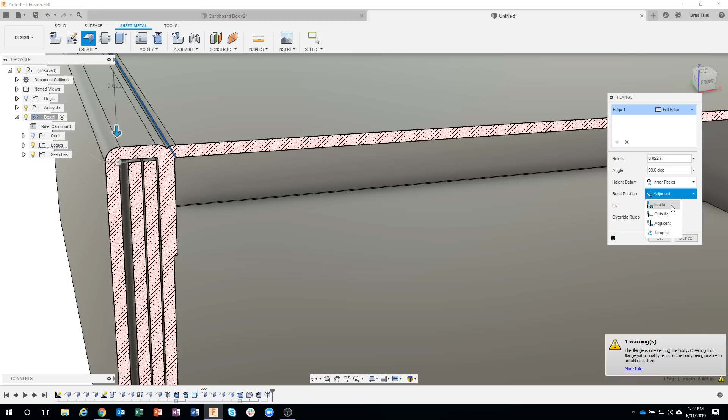So now when I click on this edge and say flange, and I start to drag down, I can quickly see I have an issue. And that is because it's set to adjacent. Well, I want this to be more on the inside, so I'm going to change this to inside, and now we can see that it's creating that bend on the inside. And I have enough clearance.

I also can see how far down I want to go, so I'm going to start to drag, and let's just click on that bottom face. But again, I can see very visually that there's something wrong there. And so that is like 3.09. So let's just set that to, I don't know, let's just try 3 and see what that gives us. Yeah, so that actually gives us enough slop right there. I could come in there and say like 3.05 and get that to whatever I want that to be. But I'm just going to leave it 3 for now.

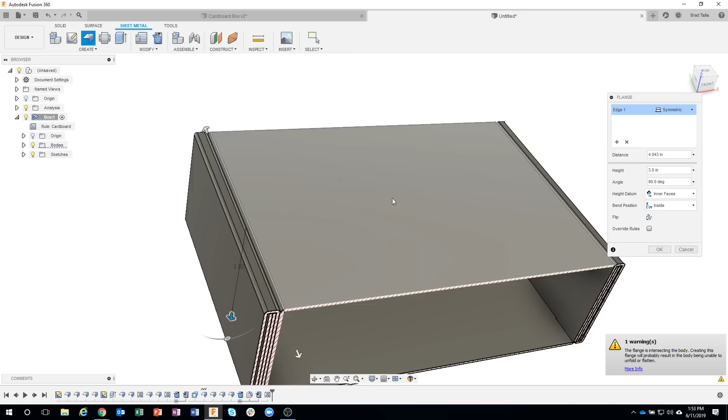And then finally, I don't want it to do the full edge because it's probably going to run into some stuff here. So let's change this to be a symmetric edge. And I'm going to turn off my analysis now. And we're still in our flange command, and sure enough, I can see something going on here. So I'm going to start to drag this back. And now we can see that that cardboard is folding inside the box instead of clashing through geometry and stuff like that. So I'm just going to click on, for example, this face here, and it snaps to that face. We're at the exact same distance.

So you can see how clean we're able to create this geometry. So symmetric, I snap to that face for the length of this, and then I was able to snap to the bottom face, the inside bottom face, for the height of it, and offset that just ever so slightly. I'll go ahead and say OK.

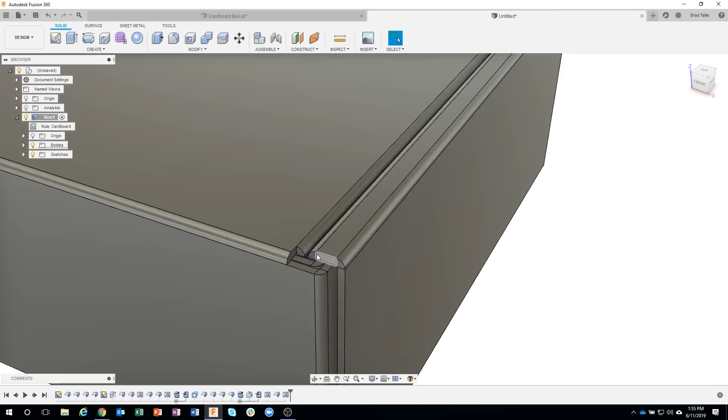And let's put that on the other side. I'll say mirror. What's the feature? Well, it was basically just the single flange. Mirror plane, we'll click on that same mirror plane, say OK, and we should see it on this side now, which we do. Let's try unfolding all the bends? It does, so we know that this is good.

Now, according to the cardboard box that I have, those flanges that we just did actually have some angle to them. Again, it's kind of hard to see while this is folded, so I'm going to unfold all of the bends, and I'm going to pick on maybe this bottom face. So we've just unfolded all of those bends. And I can actually work on this in this flat mode.

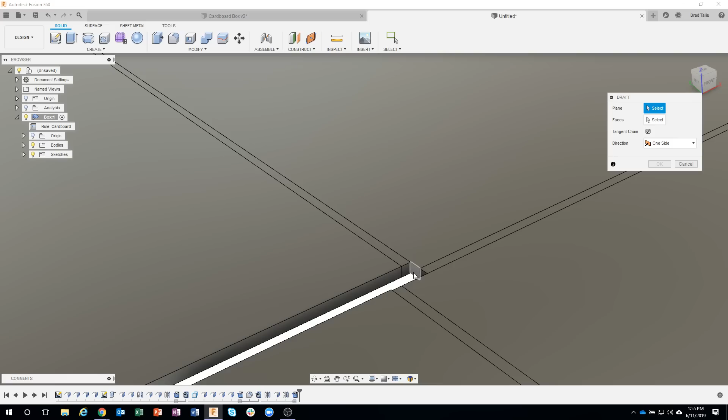So check this out. Notice it says refold faces. We're going to come back to that, but I'm going to jump over to solid. And I want to add some draft. What's the plane? I'm going to pick this little tiny rectangle here, and then I'm going to click that edge. And it remembered what I had last, but I could say 5, I could say 10 or whatever. In fact, I could add in both of these edges at the same time, or faces I should say. There we go. I'll do the same thing on the other side here. So I'll grab that face as my plane, that face as that, and that guy.

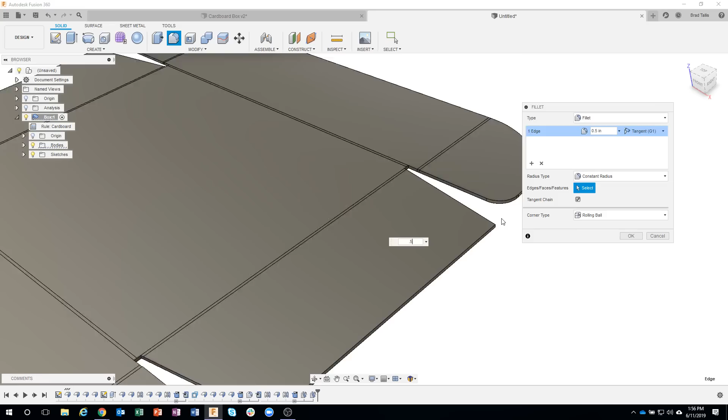I'll say okay. And I want to round these off a little bit. So I'm going to say fillet. Let's just do maybe like a half inch fillet on these corners here. So instead of sharp corners, they're nice and rounded. And again, I'm going to do all 4 at the same time. So I'll grab that one, grab this guy, say okay.

And I just modified our cardboard box while it was laid out flat. I'll go back to sheet metal, I'll say refold faces, and it's going to put it all back together. And if we were to inspect this again, let's just do a section analysis on this face and start to slice through, we can actually see, sure enough, that tapered flange that we created, that tapered flange, I should say.

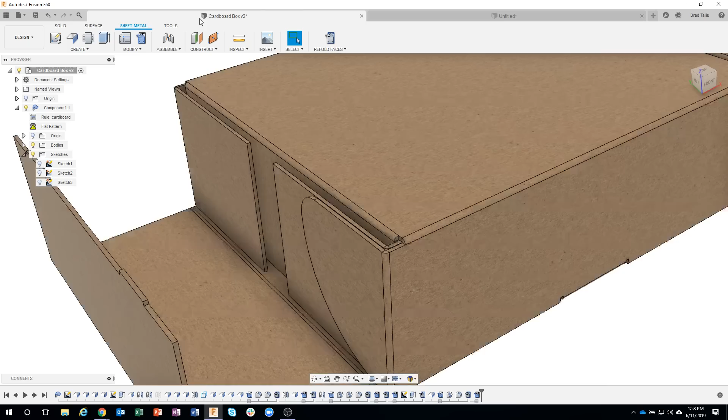So, okay, the last thing we need to do here is there's a tab in the very front that kind of holds this whole thing together. And I need to create a hole down here. Let me just show you what I'm talking about. Let's refold these faces. Basically, we're going to create this little tab that folds in and holds the whole box together. So that's kind of the final thing.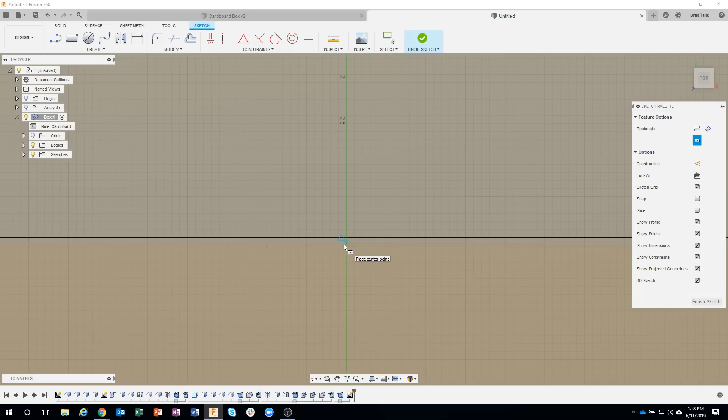So let's go ahead and unfold this box again. I'll just unfold one more time. Let me go unfold the stationary, all bends. And I'm just going to create a sketch. So create sketch. I'll zoom up a little bit. R for rectangle. I like to do the centered rectangle. And I just want to get kind of near what I think is the center here, and you'll see how it snaps automatically right there. And let's just do a 2-inch by 3/4 rectangle.

So I just drew a rectangle on that face. I'll go ahead and click that profile and say extrude. How far? I'll just click on that bottom face, say okay, and we just kind of punched a hole through here. Now, we don't have punch commands or stamp commands in our sheet metal yet, but you can basically create any shape you want and use it as a punch. Okay, and that's what I'm basically doing there.

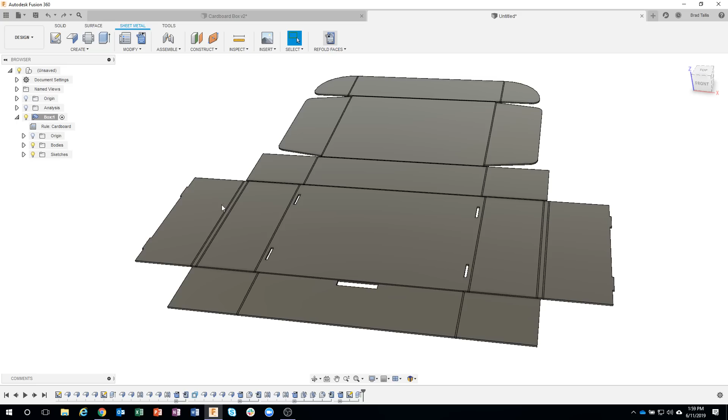And I could always come back and change the size of that rectangle. You know, we could make this to be 4 inches wide, and it will punch through. And that's kind of the cool thing about this. So I'm going to go back to 2. And I'm going to say refold the faces. So I punched it while it was flat. We're refolding it. And I must have undone too far. Sorry.

Oh, I see why. Gotcha. Just a second. Okay, oops, let me go ahead and finish my sketch. It was actually part of my extrude. Let me just go ahead and do both of those and say okay, and refold the faces. And there is that rectangle.

Okay, so now all I need to do is create that little tab. So I'm going to say flange. And again, I don't want to fold the whole face. This is symmetric, so I'm going to go ahead and say symmetric. And let's just start to drag this over a little bit, like so. And start to drag in, and we can kind of get a visual reference of what that looks like.

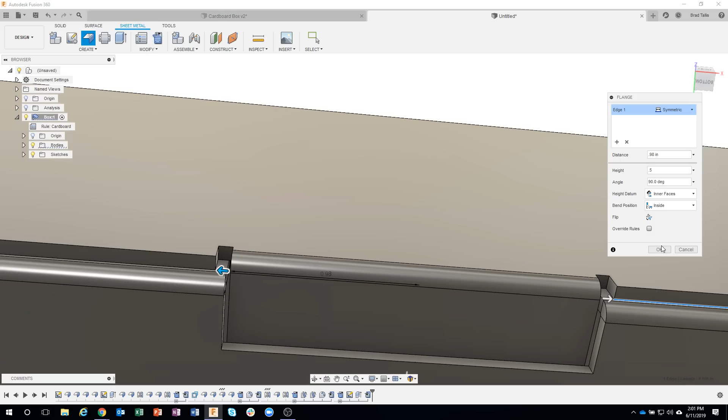Now I want to be more precise for this offset here. So I'm going to click on that face, and you can see how it snapped right to that face. But again, it's a little bit too far. I don't want them touching, so let's just crank that down just a little bit. Let's do maybe like 0.97. Let's try 0.98. 0.98 works. That looks pretty good. And then the height of my tab is 0.5. I'll say okay. And we've now created that tab.

Now to save time, it's actually tapered, but you've already seen that, where I would just come in and unfold a single bend, like so, and then I would just taper and fillet those edges. So I'm gonna skip that for now just to speed things up here. And that is pretty much it. Let's unfold the whole thing and make sure it unfolds, and it does.

And so this is what our final product design looks like. And if I were to switch to the camera, that's pretty much what this looks like unfolded. So really close up, you can see all the little tabs and everything like that. Okay, so we were able to recreate that cardboard box using sheet metal.

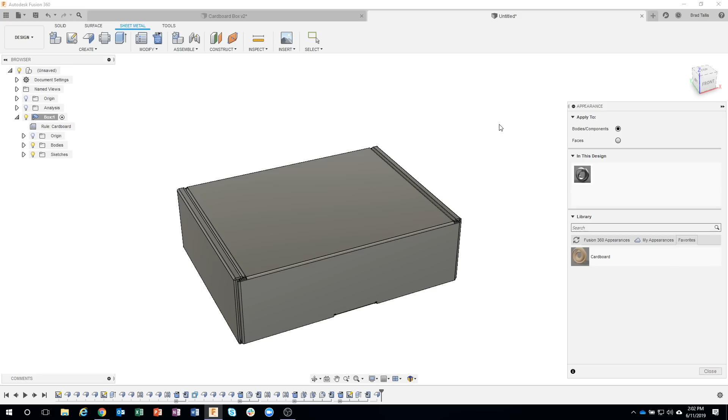Okay, let's finish this up. I want to create an appearance here. So I'm going to do A for appearance. And I actually have cardboard that I've created myself.

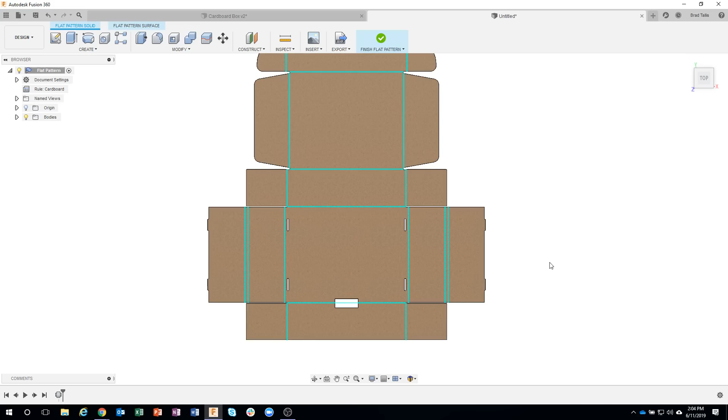We've designed this box to fold together according to the software, where we weren't having faces intersecting with each other or whatever. So for example, this tab here, we gave it a little bit of extra spacing to fit down into this rectangle. Now, let's say we actually want to force this down into there. So instead of giving it a little bit of slop, we actually want to move these faces.

So I could say press pull. I'm going to grab both of those faces and drag, and you can see that I can actually make these tabs a little bit wider. And I'm just going to do this one. I'll say press pull. I can also make it longer. And I'm over exaggerating so you can kind of see what's going on here. So I just modified this flat pattern, but watch what happens when I say finish. Notice the box is correct.

So the flat pattern is almost like, you know, a representation of this that we allow you to go in and make some changes to if necessary. Now, hopefully that's not confusing, but I find this extremely powerful. Like I said, you know, Fusion it's zeros and ones, right? Things can't clash, they can't intersect or whatever. So we had to design this so everything worked smoothly.

But now I can come back and make those tabs just a little bit wider, make them a little bit thicker, or whatever I want to do, and it's not affecting my design, it's affecting what's going to actually get cut out. Okay? So that's what the flat pattern is for. It's almost like two representations. And you'll notice right here, it says flat pattern. And when I click on this activate flat pattern, it switches into my flat pattern tab.

I could export this as a DXF if I wanted to send it to some other software or whatever to cut it out on my machine. So I'm going to go ahead and finish this guy out. And let's create a drawing. So I'm going to go ahead and say drawing from design. I have to save it. So I'm going to call this cardboard box. And it's going to create a drawing.

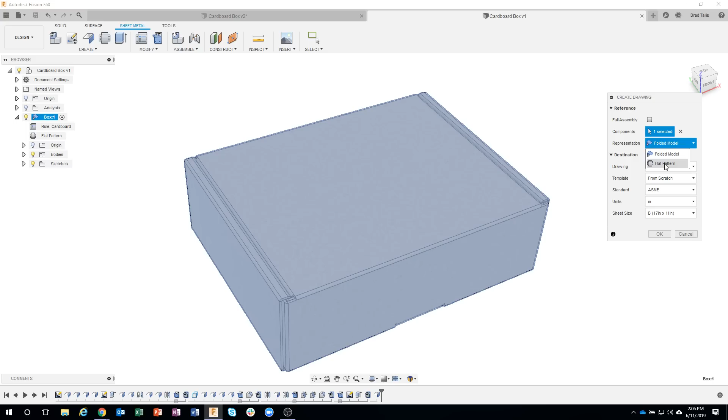Now it says full assembly. Well, I only have one part. So I'm just going to click on that component. And notice it allows me to give it a representation of the folded model or of the flat pattern. I'm going to do the flat pattern. Let's do maybe like a B-size drawing. I'll say OK.

It's going to create my border for me, and then you'll see a flat pattern representation tied to my cursor. So I'll go ahead and drop that there. I can see the different style. I'll go ahead and say OK. And there is my flat pattern representation. If I were to click on table, and again, I'm kind of going through pretty quick because a lot of this stuff is covered in other live streams.

But let me make this a little bit larger. I'll say create a table, and I'll just drop that here, and we can see that it's now going to number all of these bends, and it tells me what direction, what angle, and what radius they need to be. So we can kind of see all of them are 0.01 because that was our minimum bend radius. I could come in here and say base view.

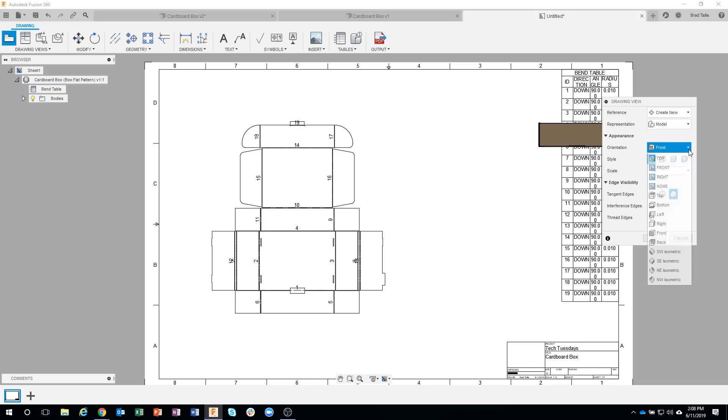Let's do maybe northeast isometric. And I want that to be shaded or something like that. And so we can actually show what it would look like folded up in our drawing. Now you can't really see all of the edges. So let's go ahead and edit this guy and make our tangent edges visible. And now you can kind of see what that would look like. Okay.

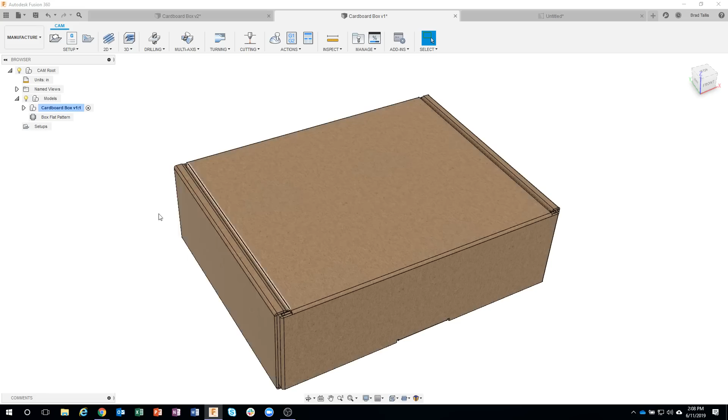So that's how you bring it into a drawing, but let's say we wanted to manufacture this. So I'm going to switch to manufacture, and notice under models we have a cardboard box and then we have flat pattern. So right now it's assuming you want to machine this as a solid. Well, I'm going to activate my flat pattern, and now you can see it looks something like this.

And again, I'm going to fly through here. I'm going to specify my setup. I'm not teaching you actually how to manufacture this, but I'm showing you that you can. So I just created my setup, and I want to do some kind of cutting. What's the tool? Let's use a laser cutter in this case. So I'm going to come down here and pick my laser cutter. So you can see a really small kerf right there.

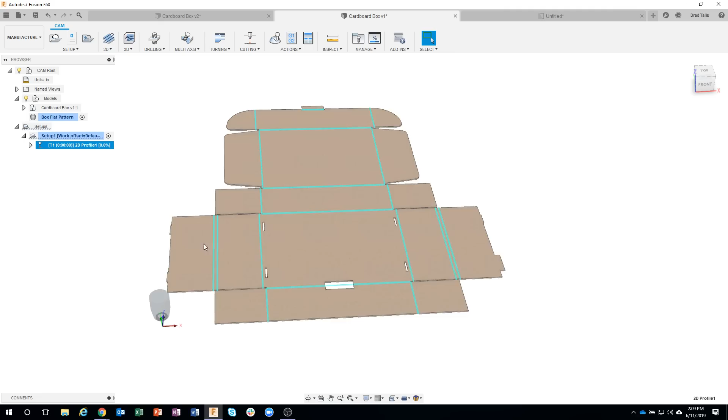What's the contour? I'm just going to go ahead and click on that part there, and you can see how it highlights everything in blue. And I'll just say OK, and it's going to create the toolpath to manufacture that. So let's go ahead and simulate this really quick. So I'll just go ahead and hit play. Let me speed this up a little bit.

But you can see it's going through and cutting all these rectangles first, and then it's going to come out and do the profile all the way around. And if I zoom up here, we can actually see that it's cutting all the way through. So you can kind of see that. Okay.

Another cool thing is I could edit that toolpath, and under, I think it's actually on geometry, yeah, I could even add in tabs. So I could specify how this thing is going to get held in the cardboard. So I could say, let's put a tab here, maybe one over here, one here, and one here. And it's actually going to add those tabs in there automatically.

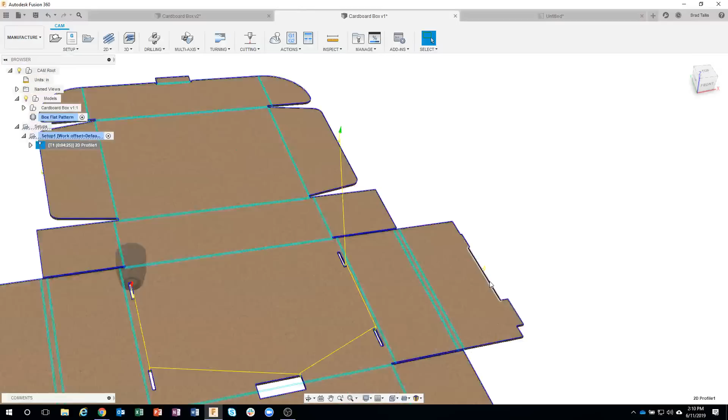So you'll see when it creates the toolpath, let me zoom up here. You can see how it's going to lift up and go across and just leave a little bit of material there that we'd have to cut with an X-Acto knife or something like that.

And then lastly, I could duplicate that profile. Let's edit it. And notice the cutting mode says through. I'm going to change that to etch. I'll jump over to my geometry. Let's just clear out the geometry. And I'm going to zoom up here, and let me just look at the top here.

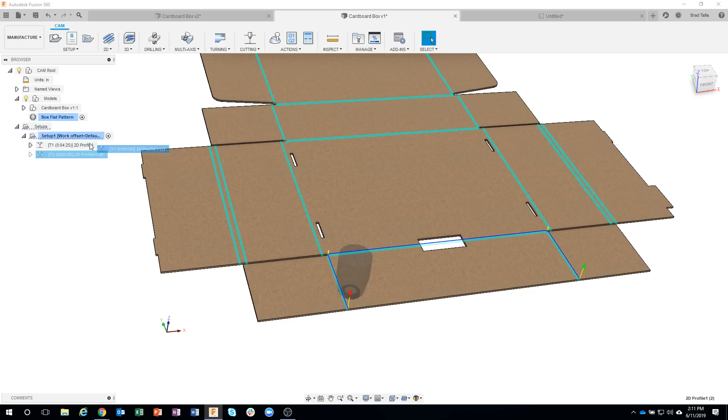I can select that I want the laser to basically etch where these fold lines are going to be, so it makes it easier for me to fold the cardboard. So I'm just going to select those 3 edges like so. And let's move that guy up above. So it's going to etch first, and then it's going to cut it out.

So let's go ahead and simulate this. You're going to see it's going to go along here and just etch those guys. And then it's going to go through and cut the rectangles. Let me just jump to the end. So we can see that sure enough, it cut all the way through here. But you can see these light green lines is where it basically etched the cardboard to allow it to fold a little bit easier.

Okay, I know I went a little bit long on that one. Hopefully you found this useful. I think sheet metal allows you to do a lot of things, so not just sheet metal. You can use it for packaging. You can use it for cardboard. You can use it to create complex shapes. There's quite a few YouTube videos out there where people want to wrap text around a cylinder, and you can actually use the sheet metal module to do that.